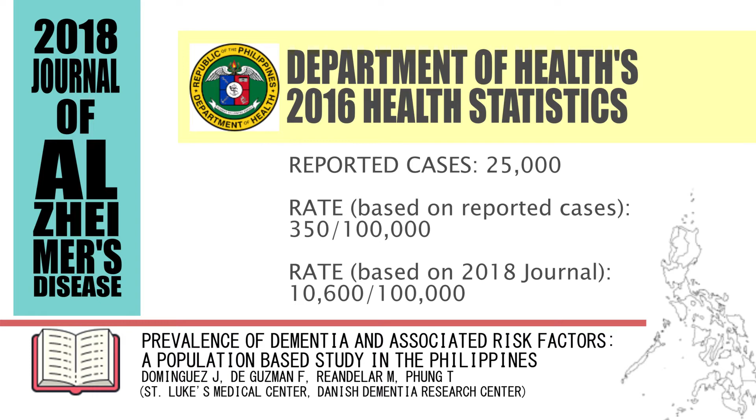However, these diseases are still not addressed properly by the local population, with various misconceptions, such as equating dementia to being senile, treating it as another case of getting crazy, or relegating it as a normal part of aging. This is reflected in how there are only around 25,000 reported cases from DOH's 2016 health statistics, a rate of 350 per 100,000 people.

Introducing the Dementia Village. It is an innovative take on dementia care employing reminiscence therapy, relying on the stimulation given by the environment to help the patients deal with their disease and its symptoms. Although dementia doesn't have a cure, these villages help raise the quality of life for the residents, which then helps keep the disease from getting worse.

La Verna Aged Care is an institution in Marikina spearheaded by Dr. Miguel Ramos Jr. It is the very first dementia village in the Philippines. It bases its care model on the first dementia village in the world, the Hogeweyk. The Hogeweyk care model was developed by the Dutch. It then gained popularity during the recent decade and now has multiple variants across the globe, in the US, UK, South America, and even here in Asia.

The Dementia Village concept was created to give those with dementia a chance to still have a normal daily life, and not be confined within hospital walls where they will slowly succumb to the illness due to the lack of stimulation. A few notable advantages of these villages are: Number 1. Increased physical activity levels of residents, especially those in long-term care.

Number 2. Decrease in antipsychotic medication use, from an average of 50% to only 12% when admitted to a dementia village. Number 3. Reduction of boredom and helplessness, and also reduced levels of depression and anxiety. Number 4. Reduced cases of patients getting bedridden, having to use a catheter, and pressure ulcers. Incontinence and restraint use levels are also found to be on the same level as conventional nursing homes.

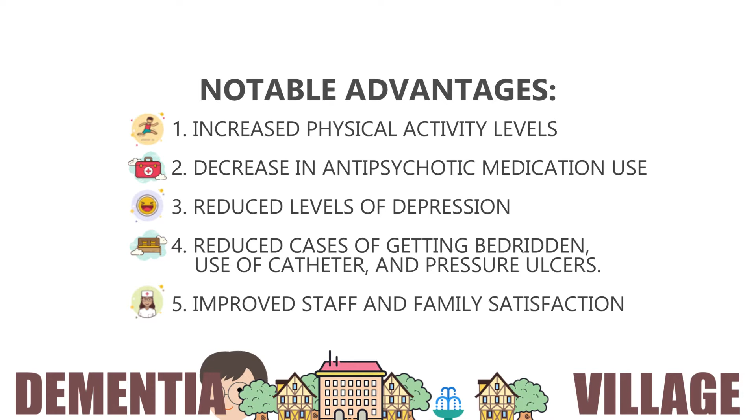Lastly, number 5. Several reports noted improvement in social engagement, less unintended weight loss, fewer falls. Staff are also less likely to indulge in absences, and an overall improved staff and family satisfaction.

Elder care is still stigmatized in the country due to the values and culture held by Filipinos. Traditions state that family is to take care of their own. This resulted in a commonality of extended families, with the children taking care of their elderly parents at home while trying to raise their own family. It is frowned upon to place their aging family members in a medical facility, as it is seen as disrespectful and lazy.

In an online medical directory, there are only 126 entries for nursing homes in the Philippines, 54 of which are located in the NCR, where even some cities have no entries at all. As of present, there is no huge change in trends surrounding elderly care in the country. Filipinos are still holding fast onto traditions.

However, a 2019 study showed a higher predisposition to institutional facilities among the older population. Around 8 out of 10 senior citizens approve the idea of homes for the aged being more accessible in the country. This is because the local culture gives leeway for the burden of difficult situations such as abandoned elders, complex disabilities, or grave illnesses.

Many nursing homes in the country focus on disabilities and illnesses rather than general care. Out of the 54 nursing homes in the NCR, more than half cater to or even exclusively specialize in special cases, especially mental decline. This is what the project aims to focus on, so let's look for a site location. Caloocan City, Metro Manila is a first-class highly urbanized city estimated to house around 1.6 million people according to the 2015 census.

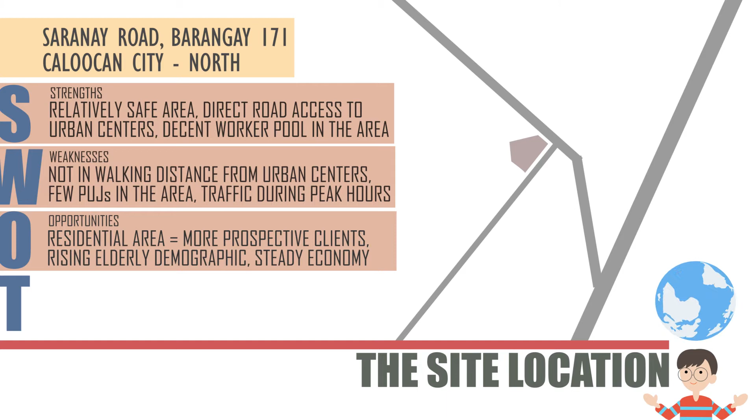Threats. The city is still growing. Future zoning changes may cause problems to the project. The local CLUP doesn't even have a specific future zoning plan for the area. The culture can also prove to be difficult in terms of the project's success, with the Filipino culture often disapproving of elderly homes.

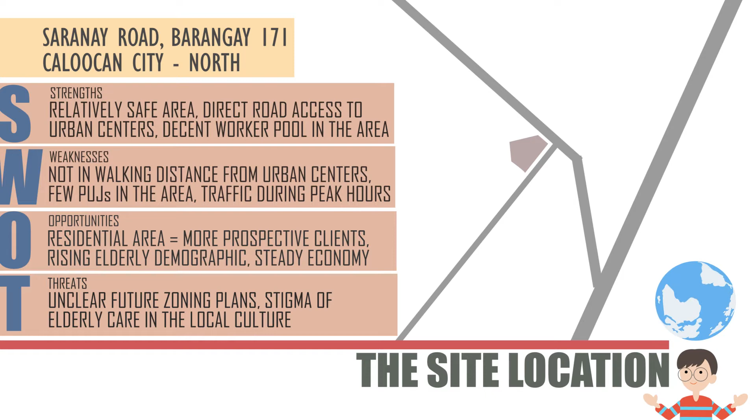Now, nursing homes are not strictly regulated in the Philippines, as it hasn't had a stable footing in the local culture. This means that the project will have to mainly rely on the National Building Code of the Philippines and the Accessibility Law, while also considering the fire, electrical, and plumbing codes of the Philippines, the DOH Manual and Technical Guidelines, and related nursing home design guidelines from other countries.

Let us tackle the project itself, starting with the framework of the structure, the building systems. These are the critical systems of the facility, entities dependent on one another to operate and to help the whole function properly. These are akin to the multiple organ systems the human body possesses that allow it to move and function. The environmental system. The system that considers environmental impact. This system considers two principles.

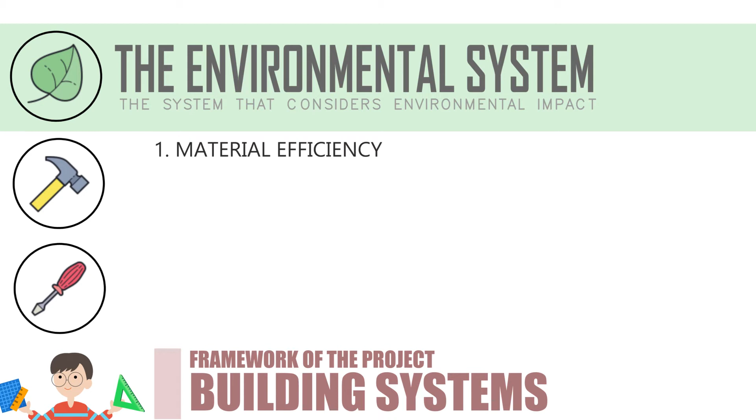Number 1. Material efficiency. We obtain our materials directly from our surroundings. Efficient material sourcing and use is a great way to reduce environmental impact. With regards to the project, it promotes sustainability by using sustainable wood, rapidly renewable materials such as straw, cotton, bamboo, cork, etc., and high-performance concrete.

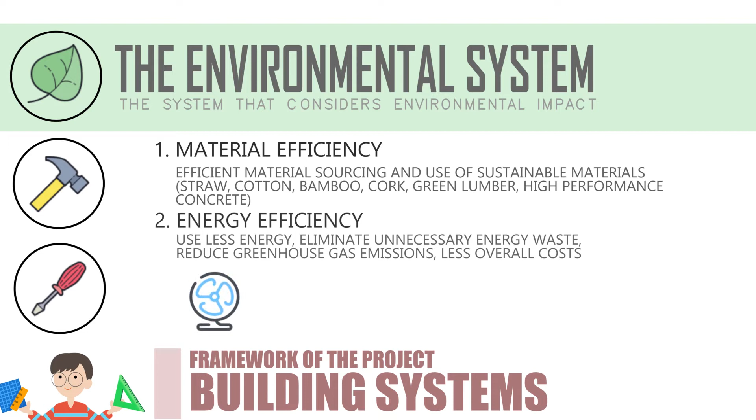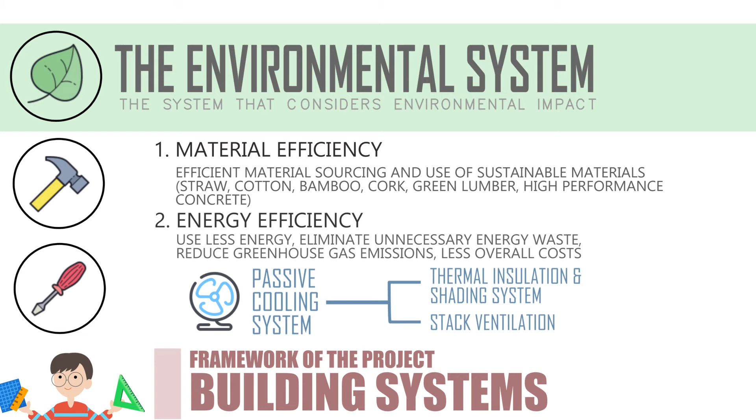Number 2. Energy efficiency. By using less energy, the facility can eliminate unnecessary energy wastes, reduce greenhouse gas emissions, and lower overall costs. A simple way to achieve this is by incorporating a passive cooling system in the design, which operates by capitalizing on natural energy to reduce the building's heat gain, maximizing airflow, and using on-site heat sinks to cool down the structure without being reliant on mechanical systems.

The structural system. This system is essentially the skeleton of the structure. The facility will be employing the simplest and most reliable system, which is the skeleton structure system, otherwise known as the beam and column system, using reinforced concrete with rigid connections for the foundation, column, and beams, and reinforced masonry for the walls and slab. The utility system.

It is probably the most extensive and complex system inside of a structure. It is composed of multiple networks, each depending on one another to do its job, making it a very important aspect of building design. This is why there is a separate profession dealing with each of these systems, as these are not only very complex systems, but because they are also tailor-made for the project. Here is a rundown on the utility system of the project.

Number 1. The plumbing and sanitary system. There are 5 major points within the system. First, the water supply system must be secure and clean to prevent outbreaks within the facility. This includes installing a reverse osmosis system on site, a gate between the local water supplier and the facility that will filter, clean, and disinfect every cubic meter of H2O that will pass through it.

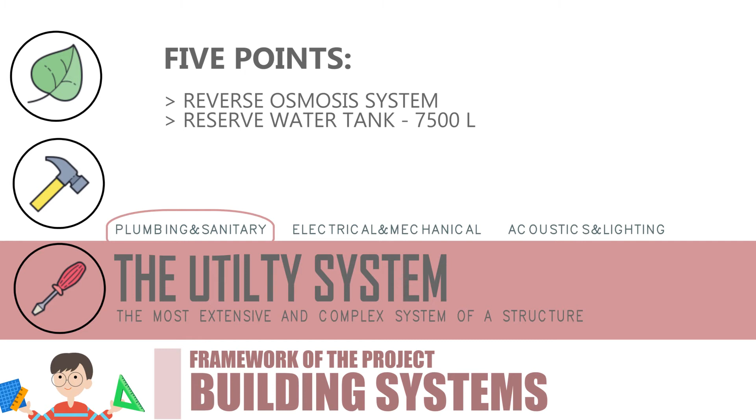Second, as an emergency water supply, a 7,500-liter water tank is to be provided for every residential unit for critical functions should a water outage occur. Third, as a means of wastewater management, a central system of sewage pipes will bring all wastewater to a central underground location for treatment and disposal.

Fourth, for rainwater management, stormwater and rainwater will be collected, treated, and repurposed for non-potable use such as gardening, toilet flushing, etc. Fifth, the waste disposal system of the facility will be composed of waste cubicles conveniently stationed throughout every space, where they will be collected after hours into a central waste disposal room for sorting and pickup.

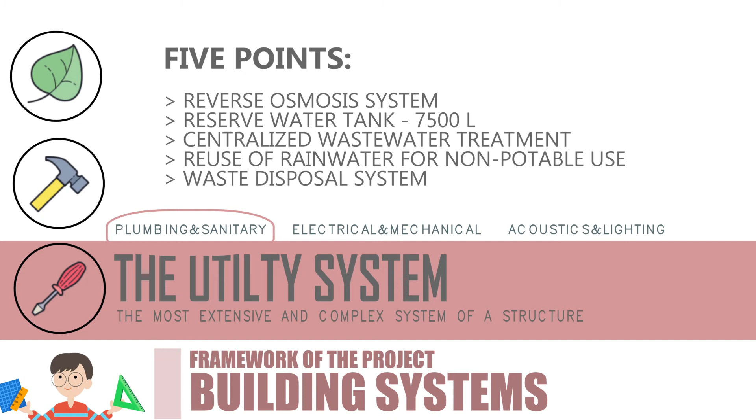Number 2. Electrical and mechanical. There are 3 major points within this system. First, the electrical system will be supplied by the local electricity supplier, and the whole system is subject to semi-annual inspection from a competent electrician.

Second, the HVAC system will primarily be composed of split-type air conditioning units, one supplied for each private room in the residential units and every space needing air conditioning, such as administrative spaces, entertainment spaces, and communal spaces.

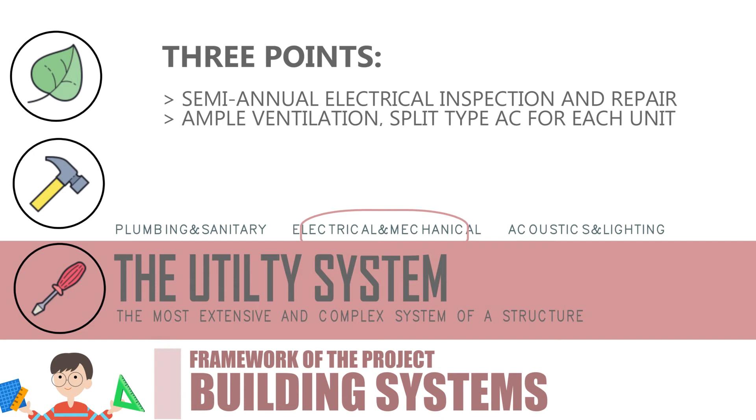Third, as an emergency electrical system, a 2,000 kilowatt diesel generator will act as a backup electrical source during blackouts to supply electricity towards the facility's critical functions such as HVAC systems in residential units, food preparations, and administrative functions.

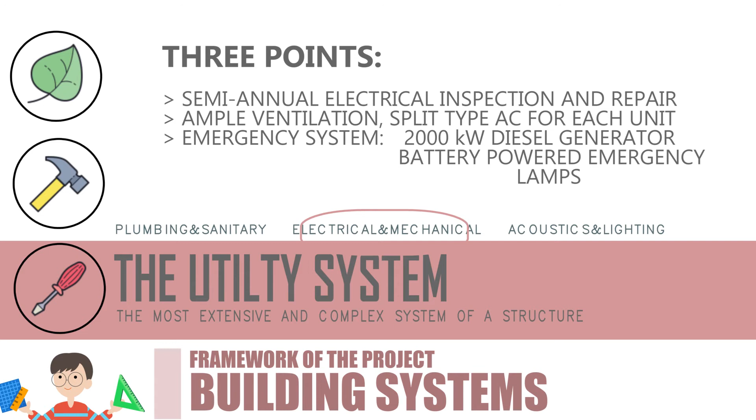Battery-powered emergency lamps will be installed throughout the structure and spaced efficiently as a backup light source. However, the generator will still supply electricity for lighting in the residential units to avoid upsetting the residents and causing accidents. Number 3. Acoustics and lighting.

First, noise reduction is necessary to avoid overstimulation among the residents. Patients need a safe space to isolate themselves from unnecessary noise. Although complete soundproofing is not very efficient, installing acoustic foam panels within spaces with high noise is more than enough to control noise levels.

Second, reverberation control is also necessary to improve conversation quality, as aging can impair hearing. Spaces vulnerable to echo at any given moment can be sparsely installed with polyester fiber acoustic panels to control echo and reverberation. Third, lighting design for dementia includes considering that these patients require above average luminance, around 750 lux, in order to see better.

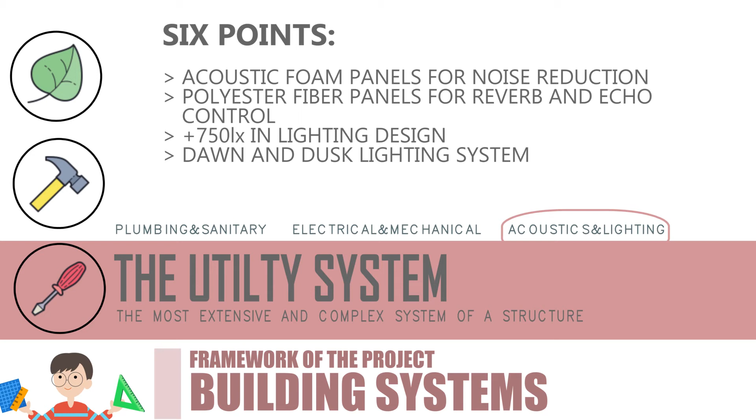The lighting needs to be properly spaced to remove dark areas and visual blind spots, as people with dementia associate dark corners with something sinister and malicious. Fourth, another aspect of lighting design for dementia is a dawn and dusk lighting system. To maintain the internal clock of the residents, light can be used to signal the movement of time throughout the day. Warm light during the early morning, then white light during the day, and finally warm light again during the late afternoon.

Fifth, task lighting is needed to help the residents with their daily routines. These are additional lighting implements in spaces that see high use, such as mirrors, sinks, dressers, etc., or areas where residents read books, do their hobbies, or indulge in entertainment. Task lights can be wall-mounted or found on tabletops, such as lamps or sconces.

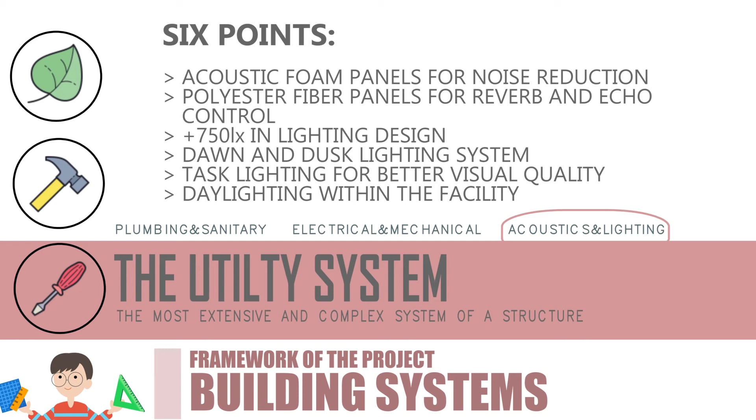Sixth, natural light is both healthy for the residents and for the energy bill. Taking advantage of the sun can improve lighting conditions, increase quality of life, and enhance energy efficiency. Most spaces within the facility will employ daylighting through wide windows, clerestories, and skylights.

An additional system for the facility, a navigational system, is added to specifically help with creating a better space for the patients. This is composed of landmarks, a thematic system that is easily understood and recognized that will notify the resident which space they are currently on, and a system of signs and guides to show where corridors lead.

The signs are to have larger and simpler font installed at eye level and adorned with simpler symbols, while color-coded line guides along the hallway floors will show the way towards important spaces, may it be the toilet, their private room, staff room, kitchen, etc.

Finally, we will tackle the design translation and features of the project. The philosophy behind the design follows the famous line of architect Louis Sullivan: form follows function. Generally, the saying means that the shape of the building should mainly relate to its purpose. The statement became a famous philosophy by modernist architects, implying that form or ornaments in a building is unnecessary and superfluous. However, removing the ornament can often lead to bare and hollow buildings that express no character or statement.

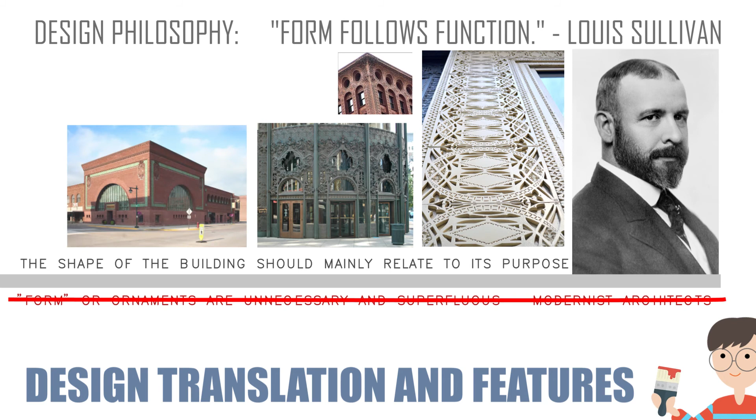The saying, however, is interpreted by Sullivan a little differently. Sullivan never omitted forms in his architecture. Rather, he complemented his works with ornaments inspired by Art Nouveau and Celtic Revival. He kept his buildings simple in terms of principal mass, but he still gave them expressive details. Following the philosophy, architecture must never sacrifice its spaces for the sake of form, as function must always be the center of design and planning.

This is extremely critical for a facility that will house patients with declining mental cognition. Every space must be planned efficiently, keeping in mind who will use it and how it will be used. However, form must not be abandoned because it is also an important aspect of architectural character. One just has to meld it along the function. The challenge with designing spaces for dementia is how patterns and textures can lead to disorientation and overstimulation, but then the lack of atmosphere and character causes understimulation and depression. This is where form needs to be carefully evaluated to complement the function.

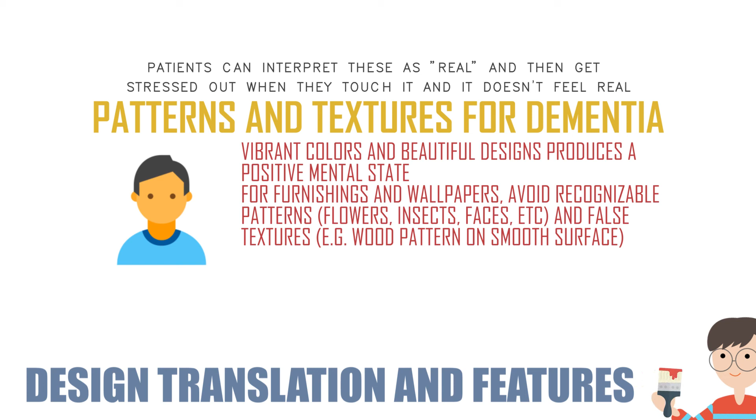A few things to note is how dementia patients respond to design. Vibrant colors and beautiful patterns produce positive effects on their mental state, but recognizable images or patterns such as flowers, insects or faces, and false textures such as a wooden pattern on a smooth surface cause high amounts of stress and confusion as they interpret these as the real thing, but then their sense of touch registers a different interpretation, which is why it is recommended to stick to abstract patterns instead.

The arrangement of spaces follows radial planning, where the site is planned and organized around the central point, the central garden, from which the other buildings branch out. This places the central garden at the top of the hierarchy of spaces, while being easily accessed by the multiple spaces around it, fitting its purpose as the hub of daily activities and a center for socialization. The ease of access between spaces is an important aspect of the project as a nursing home for the demented.

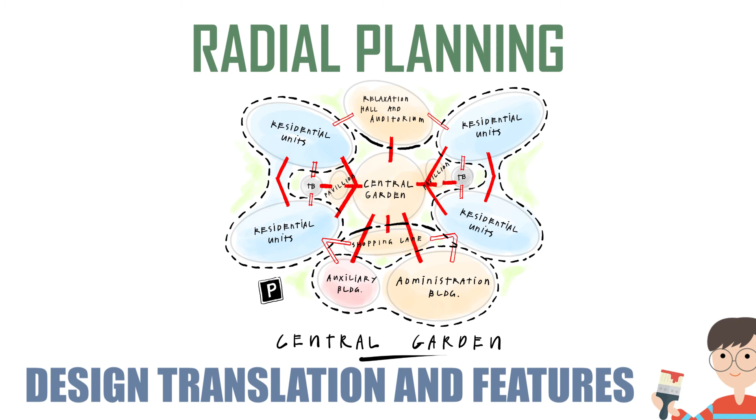The layout of the project is inspired by the umbrella. In connection to dementia being an umbrella term for numerous illnesses, the umbrella is also an important tool that provides protection and shade either from the beating sun or the cold rain. This creates a connection to what the facility shall serve as, a protective space for those with dementia, shading them and giving them a comfortable and safe place to live their life. The circular form of the umbrella also lends well to the radial planning applied to the site, so that even when dismantled, a radial pattern can still be created.

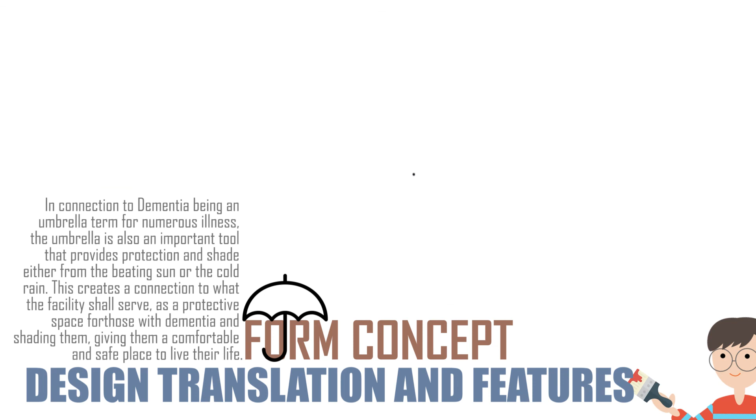Here's a short evolution of form. The umbrella first multiplies, then the focusing of shape and addition of green spaces, the implosion of shapes and rearrangement, and finally, refining the layout.

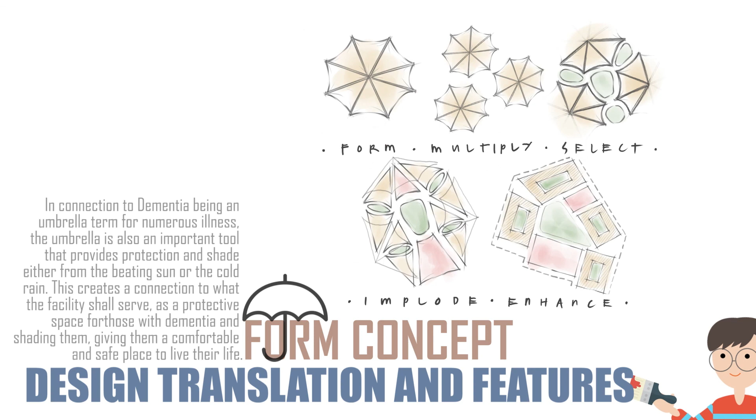Lastly, the architecture of the building will be based on traditional or vernacular architecture. One of the most notable features of reminiscence therapy for dementia is the replication of their past to calm the mind, as it has been noted that mental decline often affects the latest memories, with the person remembering only their past as they slowly age. Incorporating traditional Filipino household features in the residential units can help make the residents feel more comfortable, giving them a recognizable environment to reduce disorientation, confusion, and anxiety.

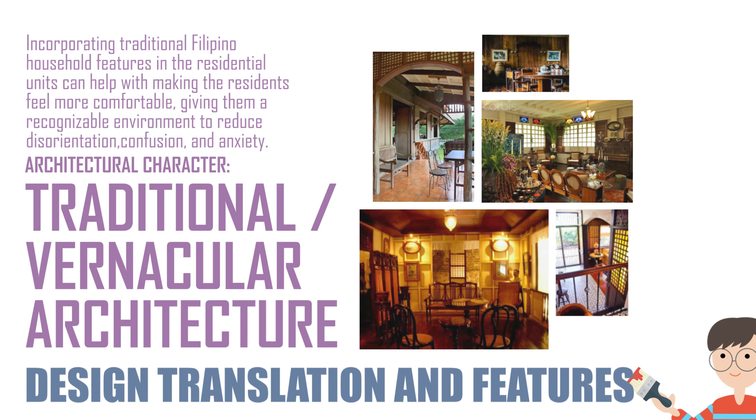Traditional Filipino homes are often a variation of the nipa hut, the bahay na bato, chalet, or American-inspired bungalows. More often, the houses are a mishmash of the styles above, defining the vernacular style of architecture in the country. The project will have to take inspiration from these various styles and plan accordingly.